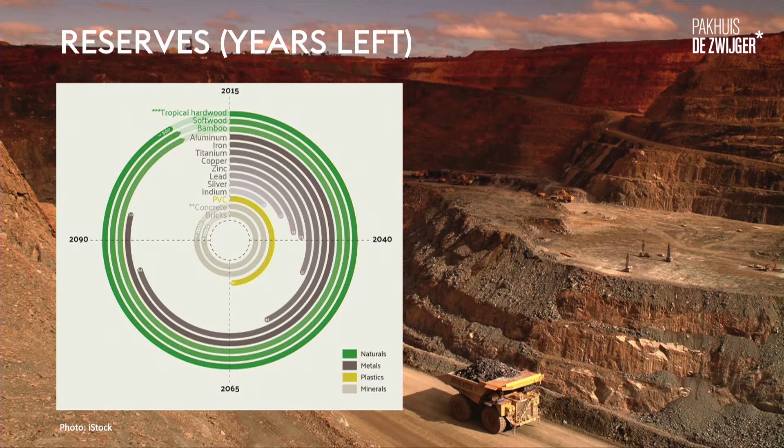In this graph, you see the reserves of the most important materials. And you also see that by the end of this century, metals used in the building industry will be depleted. And the same applies to plastics. And don't put all your money on the circular economy, because only 9% of all our materials worldwide are actually being recycled.

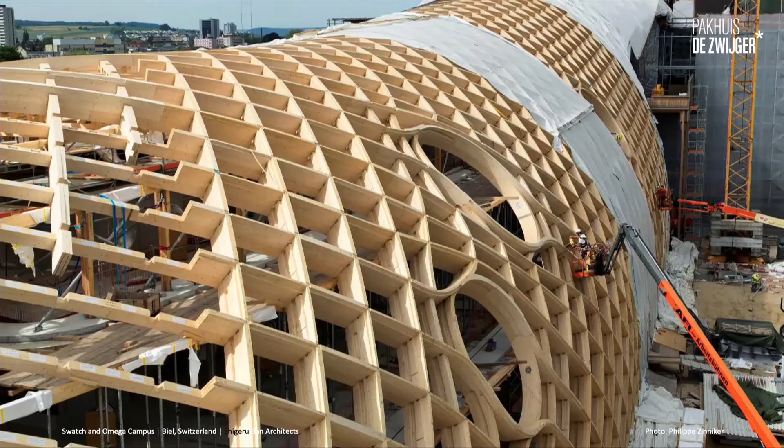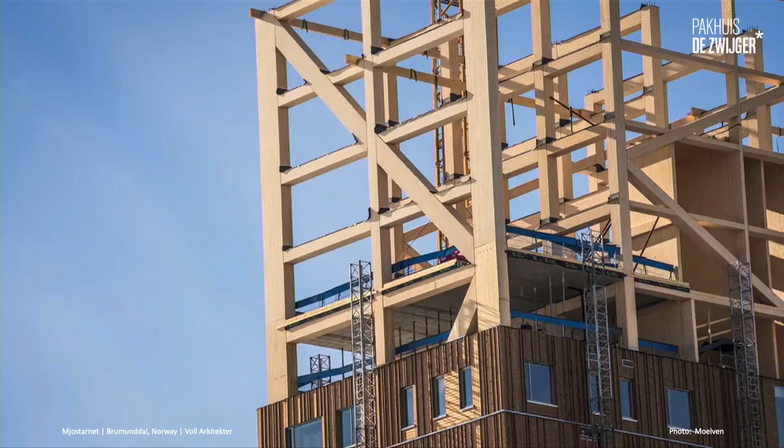I compare it like building with Kapla. Maybe you have done it in the past. Very rectangular, evenly strong wooden elements are used to create all kinds of buildings and fantasies. Well, this is not fantasy anymore, because this is Kapla for grown-ups. This is mass timber. So you can make enormous structures out of uniform elements with mass timber. And we can also build skyscrapers this way. This building is 85.4 meters tall. It's in Norway, built with glulam beams and cross-laminated timber.

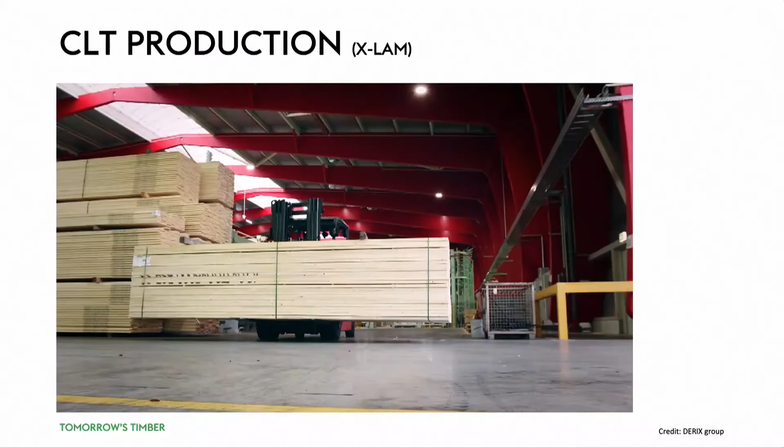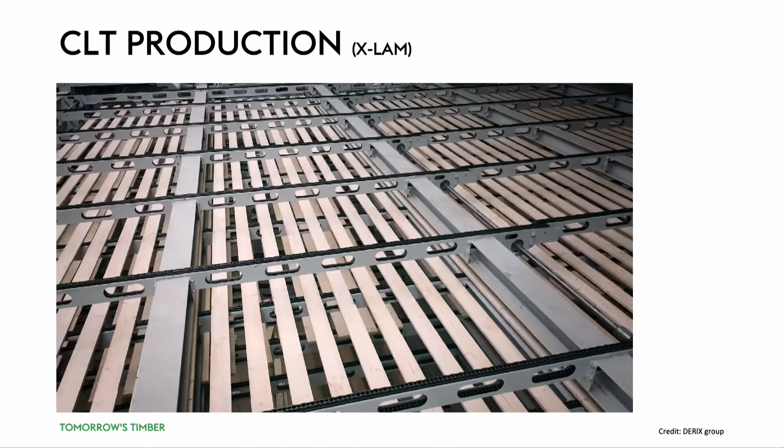I'll show you how this is produced. From sustainably managed forest, you take boards from softwoods, abundantly available. Then these boards are connected to each other in a longitudinal way with a finger joint. So you have very long boards where all the defects are taken out. So uniform strength. Then you locate them on top of each other, and then you cross-laminate them. And then again, up to 3, 9, maybe even 11 layers thick.

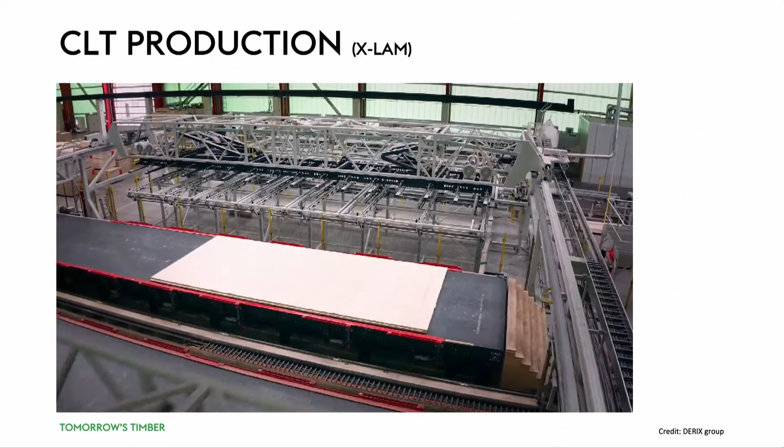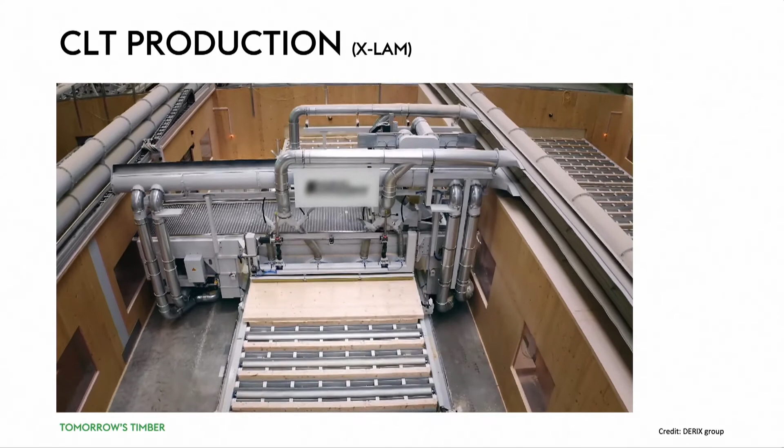The glue that's used, it's only 1%, and that binds the walls and slabs together to get a very strong wall or flooring element. The good part is, in the factory, as you see here, you can add all the fittings, all the sleeves for the electricity, for the installations. And then your building site becomes like an assembly site. It's almost like a huge IKEA cupboard. Everything comes pre-packed, you take it out of the package and install the building in a very quick manner.

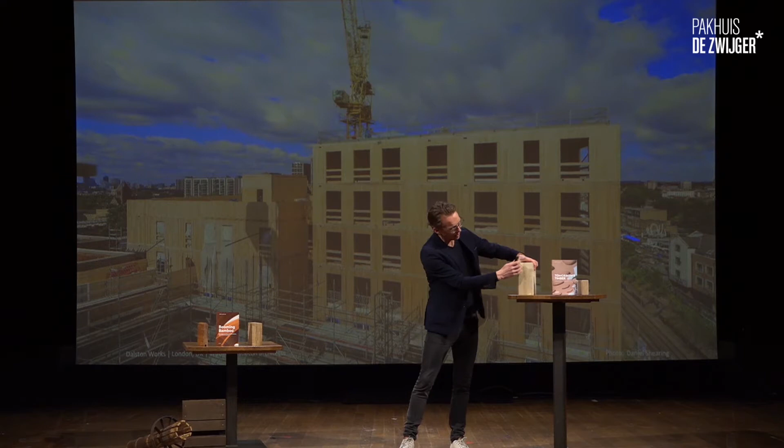So this is an example of cross-laminated timber. So you see here the various layers that are being used. The top layer can have, for example, an oak finish or another more luxurious wood type. So this way we can build very high buildings in a very quick way. The tallest building so far, the Mjøstårnet building in Norway, I told you, almost 86 meters high. And it was built also with all these prefabricated elements. And the construction time was 1 year quicker than it would have been built in situ concrete.

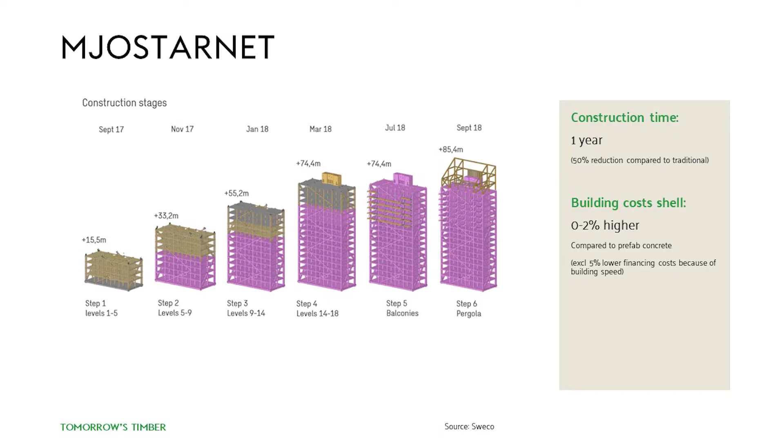Altogether, the building costs are more or less as high as building in prefab concrete. Then if we look at the biggest myths, because I hear your brains already thinking, okay, very interesting, but what about fire safety? Is this durable?

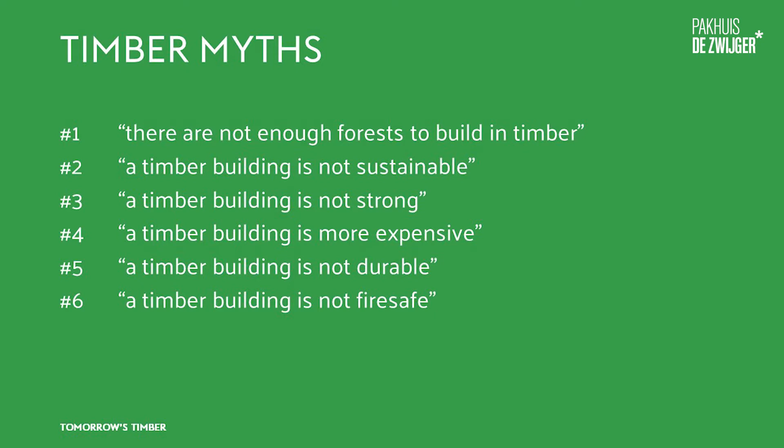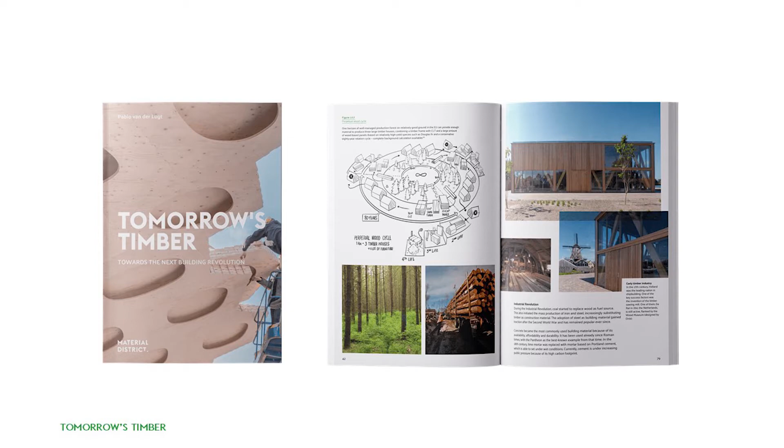So there are many myths about mass timber building. And actually, I also had these questions about 5 years ago. And I did a lot of research about it, and I published it in this book, Tomorrow's Timber. And I can tell you most of these fables can be dispelled. And I'll tackle a couple of them in this presentation.

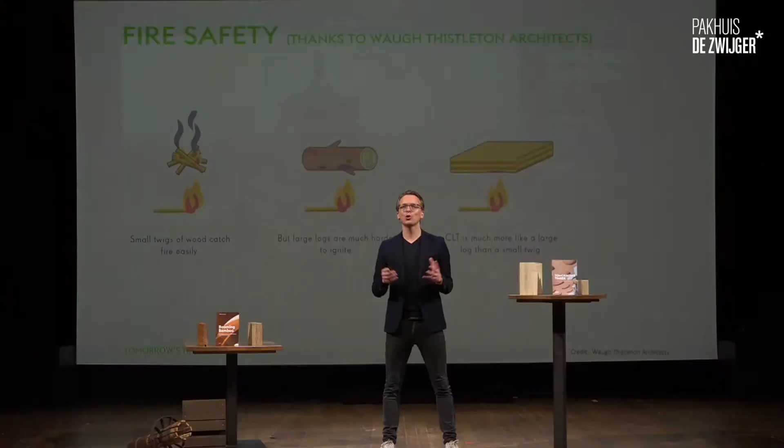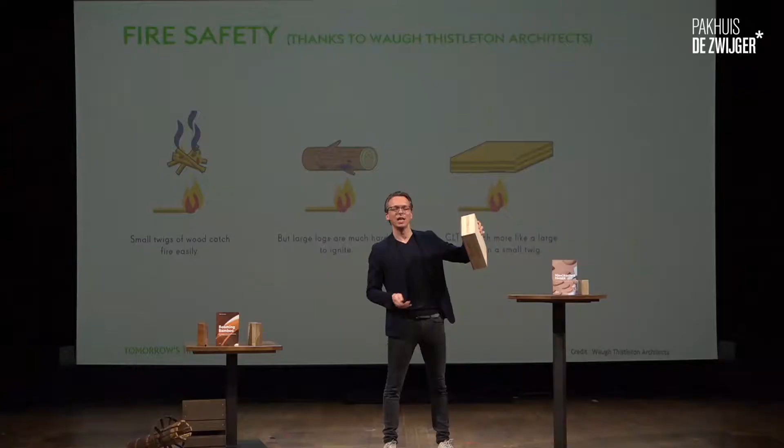Fire safety. Well, if you try to put this block in your fireplace, you can imagine what happens. It will extinguish, it won't burn. You maybe have a little bit of charring. And that's also how we tackle fire safety in mass timber building.

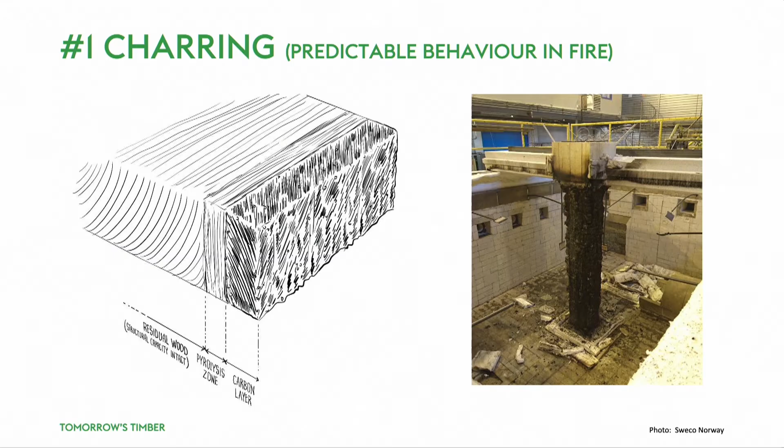The example on the right is a one-on-one fire safety test on the Mjøstårnet building in Norway to reach the 120-minute fire safety class. And they just do it by over-dimensioning slightly and knowing that at the outer layer of the wood, there will be a charring layer. And behind this charring layer, the wood will keep its structural quality. So you can exactly do the calculations.

Usually it is combined with encapsulation, so part of the timber will be finished, for example, with gypsum board, and combined you easily reach all the fire safety classes. So usually it's done this way. One of the surfaces is kept intact, and further a little bit of over-dimensioning, taking into account the charring. So these are fables that can quickly be dispelled. Fire safety is not an issue, durability is not an issue.

But let's look at the more positive things about building with wood, because building with wood gives a lot of fun and energy. It's good for the planet, it's good for people. So let me quickly take you through some evidence based on these aspects. Well, first of all, when trees grow, they absorb CO2 from the atmosphere. This is the magical formula, photosynthesis. Storing CO2 in the wood, oxygen as a bonus in return.

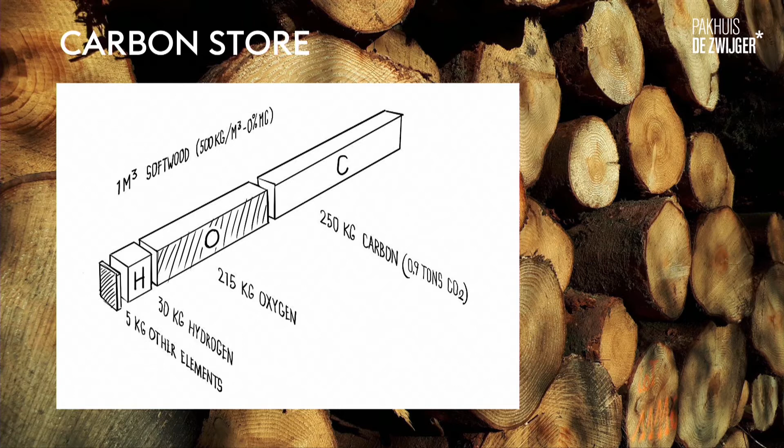And through the lifetime of the wood, the carbon will be locked in the material. Half of the wood's weight is carbon coming out of the atmosphere. In general, you can say that 1 cubic meter of wood captures almost 1 ton of CO2 for the lifetime. So it's a kind of carbon store.

And then if you look at the CO2 emissions during production of CLT, I just showed you this factory, you can see here that CLT uses a little bit lighter wood species, so it captures a little bit less CO2, almost 3/4 of a ton. And then you see during production, in total, glue and energy for pressing, sawing, transport, it is only 20% of the CO2 emissions compared to the CO2 locked during the lifetime of the material.

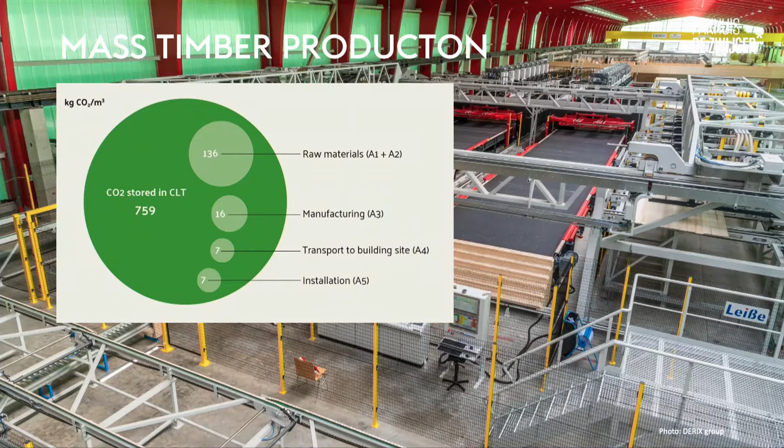And then if you take into account that all this wood comes from sustainably managed forests, so a tree is harvested and a new tree is planted back, then you can understand that the forest becomes a carbon pool, and the carbon will grow, and then it will be harvested. And then the wood, you shouldn't burn it for energy, but you're going to put it in the built environment, and then you do it again. And the carbon will be locked for even longer in the built environment.

So if you start building with wood instead of concrete and steel, per ton of wood applied, you save around 1.5 tons of CO2. So that's the third benefit of mass timber building. And then these kind of buildings actually are a carbon store, a huge carbon bank.

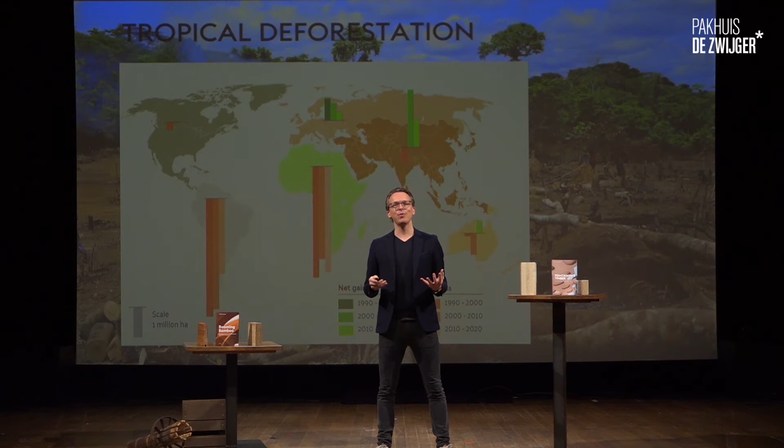So, carbon negativity. Second point has to do with the renewability of timber. And what always fascinates me, I always get this question: but if we build in wood, then we have to cut the tree, and we will lose all our forests. But people don't think where the metals and the mineral materials come from. They don't grow back. But I understand where it comes from. It has to do with all our memories related to tropical deforestation.

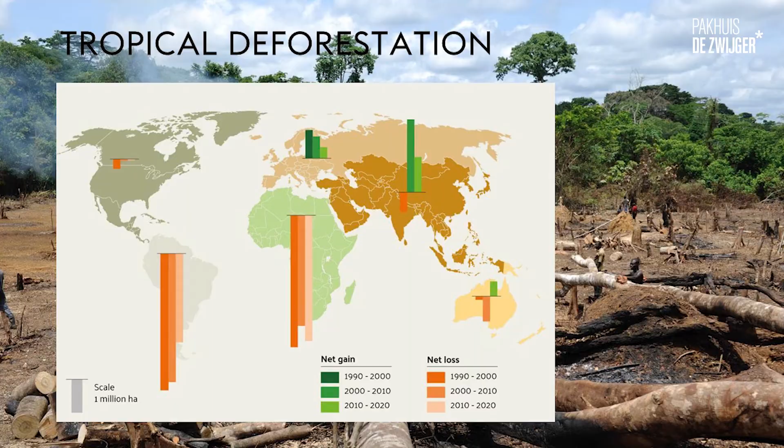And yes, tropical deforestation is an issue, but the driver for tropical deforestation is not the demand for wood. It is conversion of land for large-scale agriculture, for palm oil, for soybean production, and especially for the meat industry, conversion to cattle land, and infrastructure. These are the drivers for tropical deforestation. And if you look worldwide at the forestry trends, yes, this tropical deforestation continues. But in the northern hemisphere, you see that the area of forest is actually increasing, already the last 30 years in a row.

And if we then zoom in to the European forest, there's an area of about 180 million hectares in forest. That's about 40% of the European land cover. It grows by 0.3 million hectares a year. Almost all these forests are sustainably managed. And more than half of them are actually sustainably certified following very stringent chain of custody guidelines by FSC and PEFC, safeguarding social, environmental and biodiversity issues.

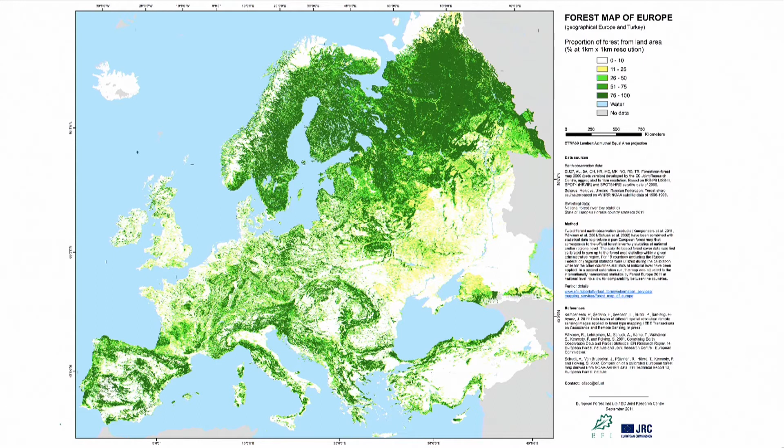So this is what that looks like in numbers. Every year there are 800 million cubic meters of wood that grow. Of this, 500 million cubic meters is harvested. And about 50 to 100 million cubic meters of that is available in quite accessible places. So we could ramp up by 50 to 100 million cubic meters right away if we build more factories.

And if we look at the building deficit and home deficit in the European Union, but also in the Netherlands, and then look at this additional potential capacity of 70 million cubic meters, and take into account converting that to mass timber products, you will have about 30 million cubic meters. A house like this, a private home, a big one, uses about 60 cubic meters. An apartment would be 30 cubic meters.

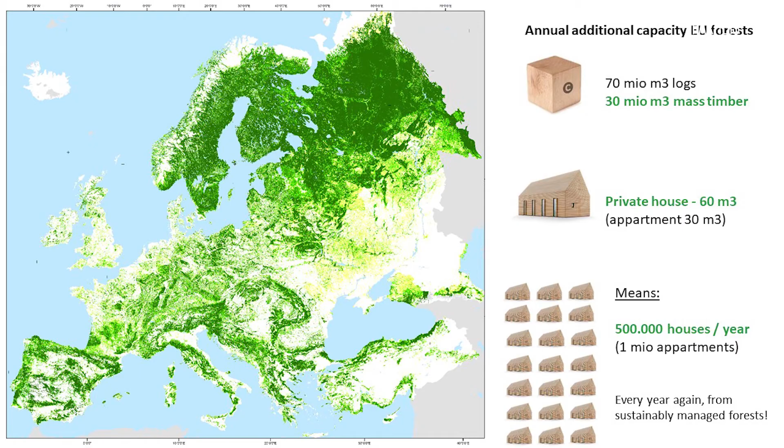That means that just based on the annual available capacity, we can produce in a sustainable way 500,000 houses each year, just from the available additional stock that we have in our European forests. So don't worry about the availability of wood. And I don't talk about cutting trees, it's harvesting trees, because they are sustainably managed in our forests in Europe.

Then the third point is circularity. Everyone is talking about circular building. But the good part about bio-based materials and timber is that they are workable. So you can work them again. You can cut a piece off, you can shave it at the end of life. You just have to think about demounting them and making connections that are demountable at the end of life. This is a terrific example right from the central business district in Amsterdam, CIRCL Pavilion.

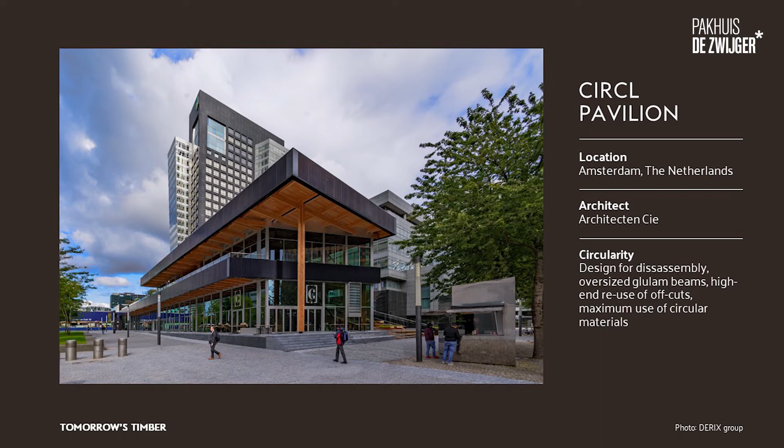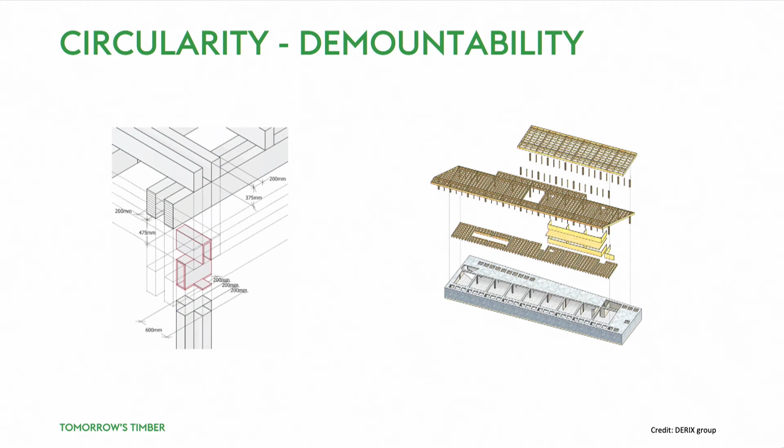And when bankers start building in wood, then it becomes interesting, because then you know the business case works out well. Here you see how these demountable connections are made in this building. And the members, the glulam members, are slightly overdimensioned to make sure that in the end of life it can be taken back and it has multiple uses in new applications. The producer and the contractor have already said, I will take the timber back because it just holds so much value. Never are you going to burn this because it just retains too much value.

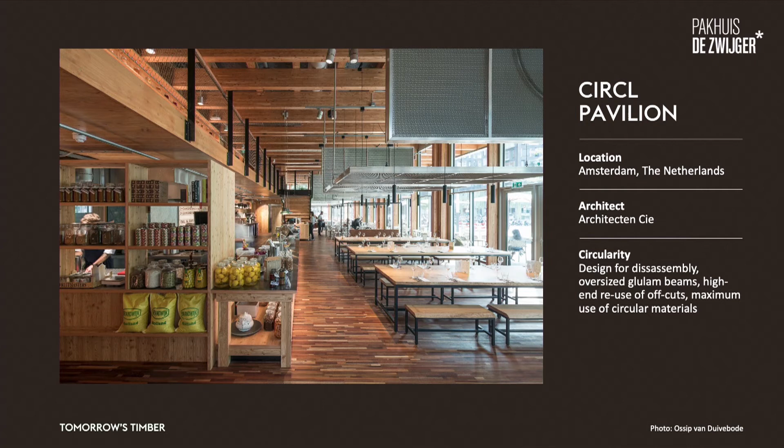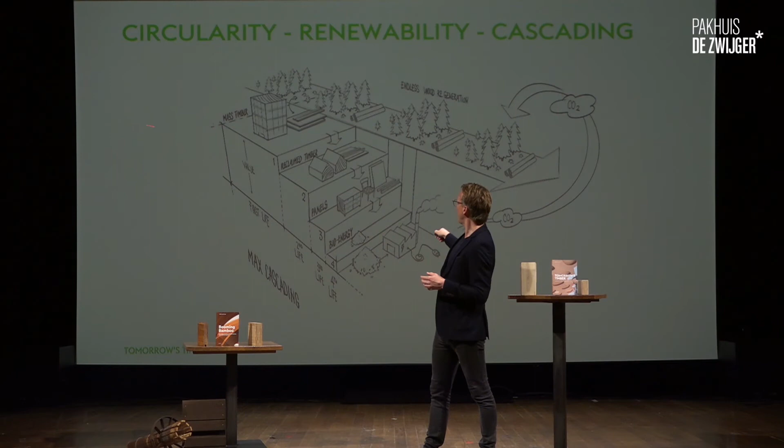This is what the CIRCL Pavilion looks like from the inside. Also the interior is fully circular. And then when you start to think of circularity, and you look at the renewability also, and take that into account, then if you have a mass timber building, the first life will easily be 50 years or longer. Then if you build it in a circular way, the second life will be maybe as long. So you easily reach the 100 years.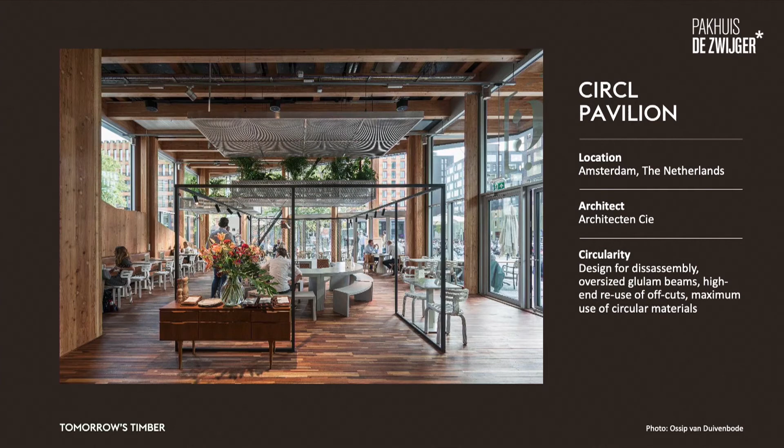Only then you start chipping it for panel production. And only in the fourth life are you going to use it for bioenergy. That makes sense. And in the meantime, you see that the trees have grown back 2 or 3 times in sustainably managed forest. To me, this is what circularity is about. And if you look at the CIRCL Pavilion, actually the flooring is a second life use of timber from other buildings. And you can also do constructions this way.

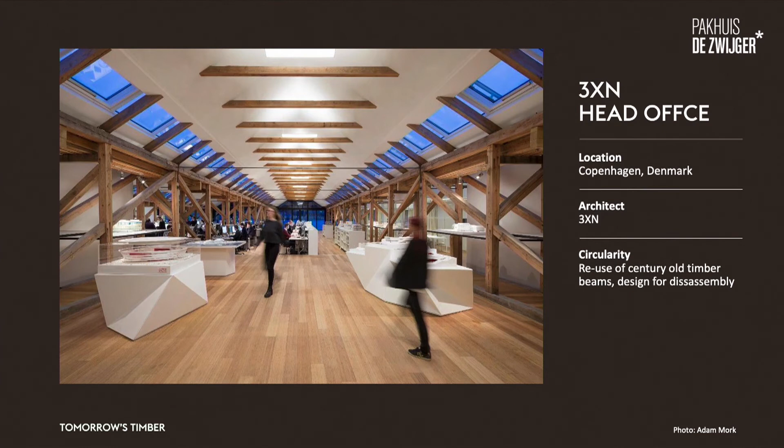This is an architectural office, 3XN, in Copenhagen. And they make a one-on-one reuse of these beams that are recollected from a nearby naval warehouse and reused in the bearing structure. So this is very beautiful, locking carbon, but also circular building.

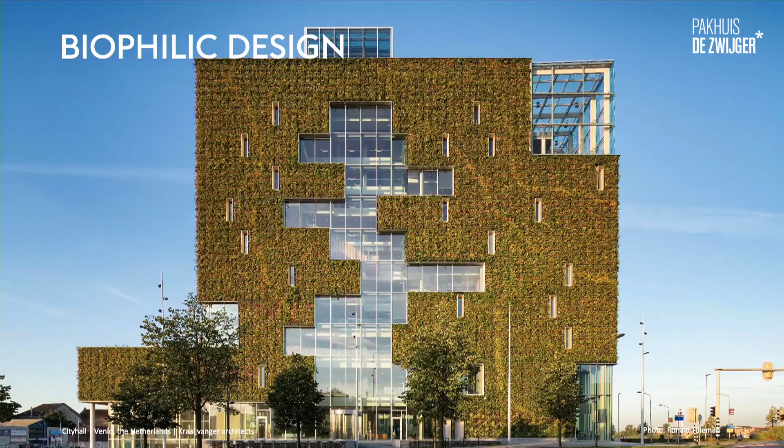Then the fourth aspect, that has to do with us as people. We are basically creatures from nature. That's why we like to be in nature. That's also why we connect so much to natural materials, also in the inside. This is called biophilic design. And there are more and more studies that show that people love to be within a natural environment. This building is a beautiful example of a work environment where biophilic design is taken into account. The facades are totally green.

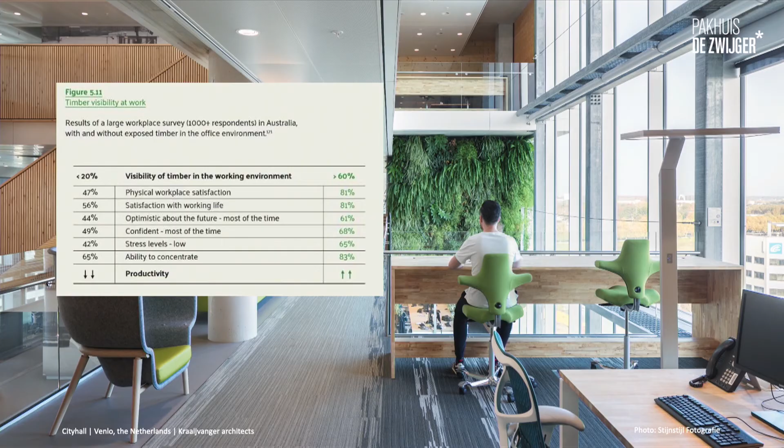This is City Hall Venlo, by the way, in the Netherlands, built following the cradle-to-cradle principles. And in the interior, you see a lot of natural materials that are being used, and a lot of plants. And we see more and more research that shows that people living in an environment where biophilic design is taken into account, and natural materials in the surfaces are a very important aspect of that, have better productivity, higher concentration levels, lower stress levels, and this is also directly related to the visible use of timber.

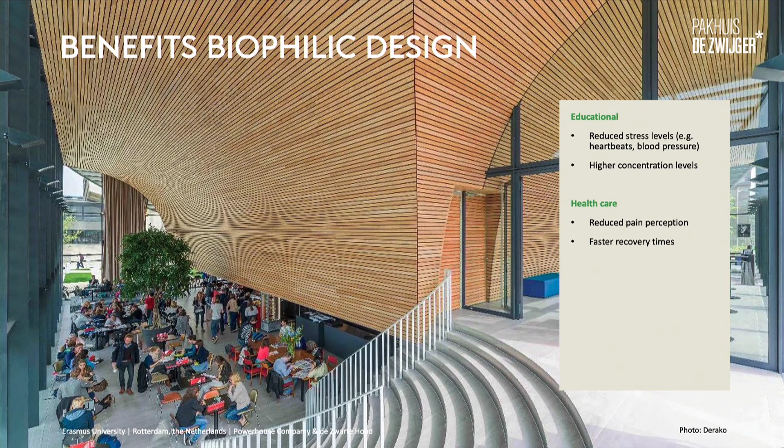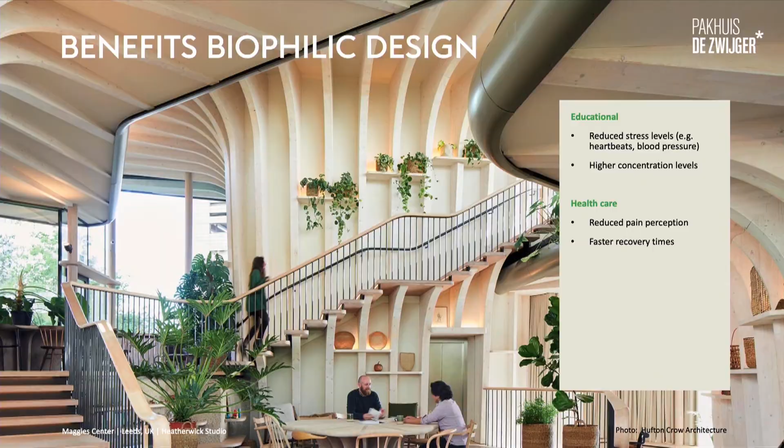This also applies to our schools and educational institutes like universities. There are various studies that show that people love to work in a neighborhood where wood is in the surroundings and have higher concentration levels. Hospitals, cancer centers, the Maggie's centers in the UK, they all apply a lot of wood in a visible way in the interior, showing even quicker recovery rates and at least lower stress levels. This is another example of a Maggie's center in the UK.

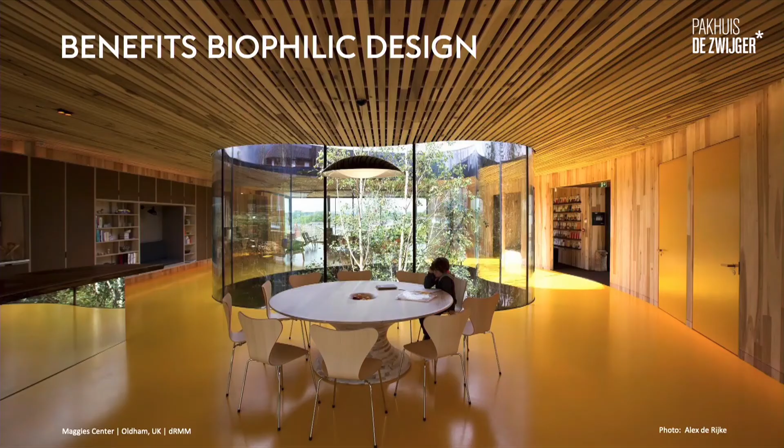Look at the tree that's located right in the middle of this building. So you see the source where the wood comes from and how it is applied. Very interesting aspect as well. So these are a little bit more, let's say, environmental and people aspects why people should build in wood. But there's a very practical aspect to it as well. Mass timber has major advantages during the building process, and that pays itself out.

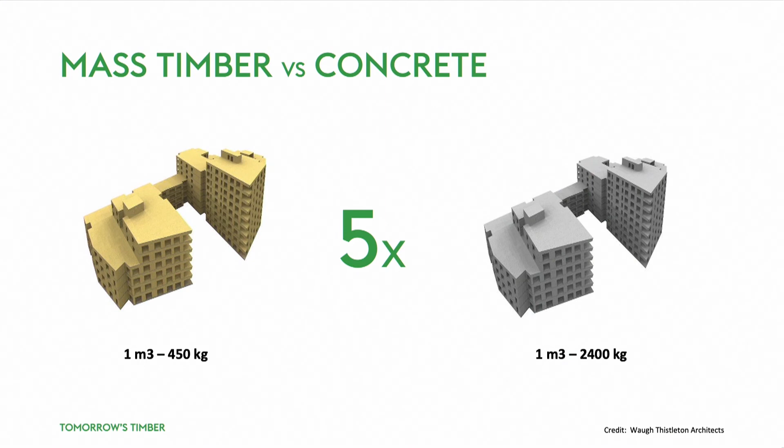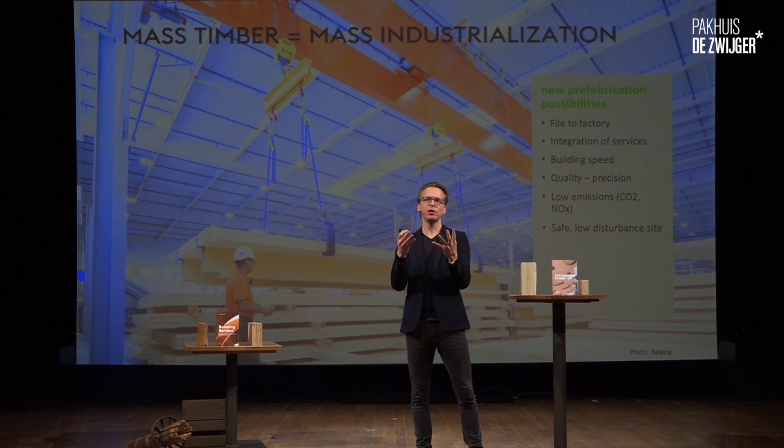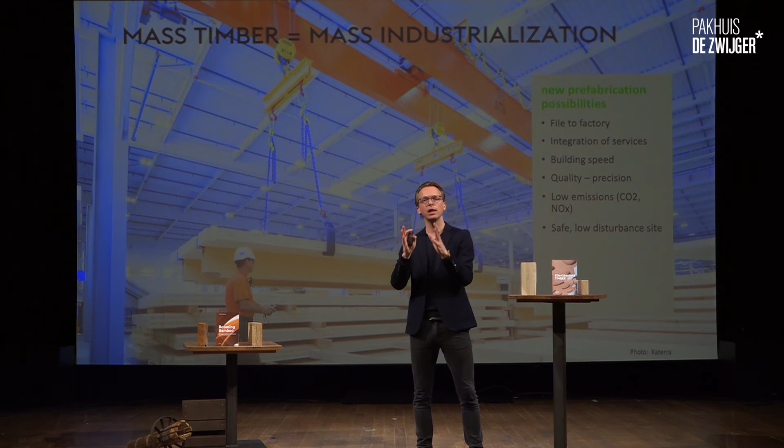If you look at mass timber compared to concrete, it is 5 times lighter. That means you have to build in a different way. And the prefabrication possibilities of building in mass timber are huge. Using a BIM system, a building information modeling system, you can send your design to the factory, which can directly prefabricate those big wall, ceiling and flooring elements, including all the installations. This way, the building site will become, as I mentioned in the beginning, an assembly site.

And you might see this building. I want to show this as a case. Dalston Works in London by Waugh Thistleton Architects. You might think, well, this is not wood.

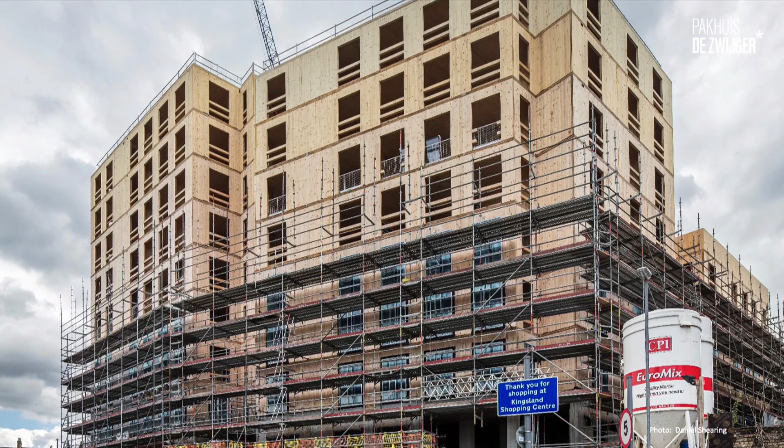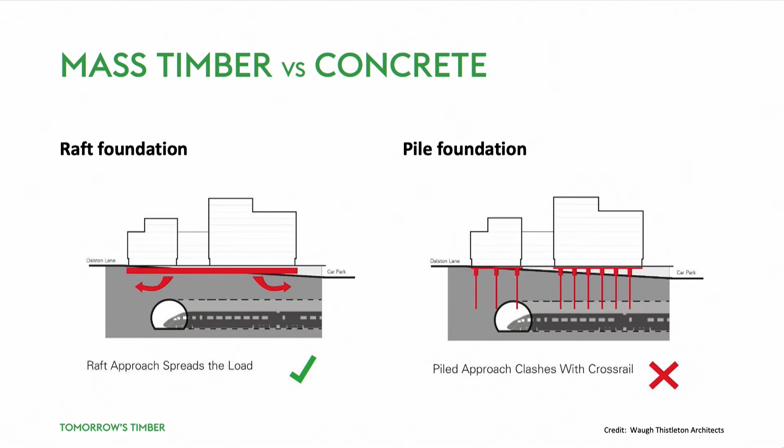If you look at the inside, you don't see any wood, but it's fully made out of mass timber. They used mass timber here for practical reasons. Why? Because this one is in the middle of London, and there was a tube going below. So they needed a light structure. They needed a raft foundation. That's why they started looking for a lighter building construction method, therefore mass timber.

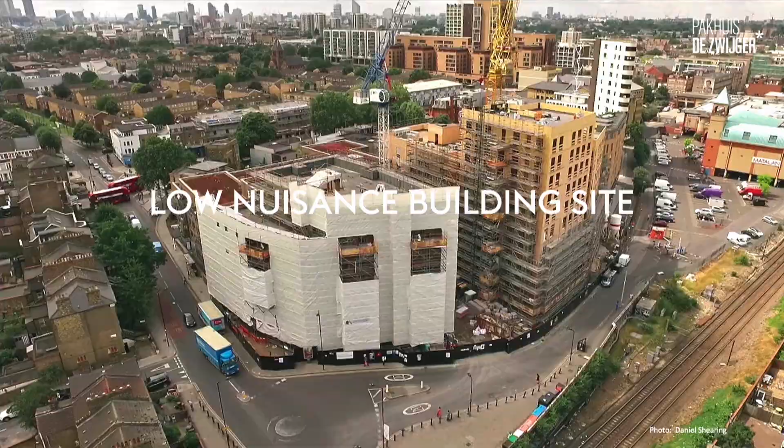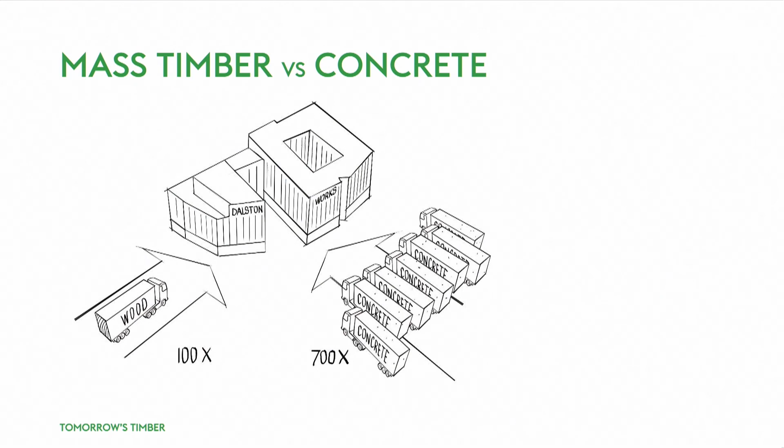Also, look at the building site, right in the middle of London. Very little space. People don't want noise here. So they wanted to make the building process as short as possible, with as little nuisance and noise from heavy trucks that supply the building materials as possible. Using mass timber only meant 100 heavy truckloads instead of 700 if this building would have been made in concrete. The building time was 9 months quicker because of this IKEA-type building system, just an assembly site.

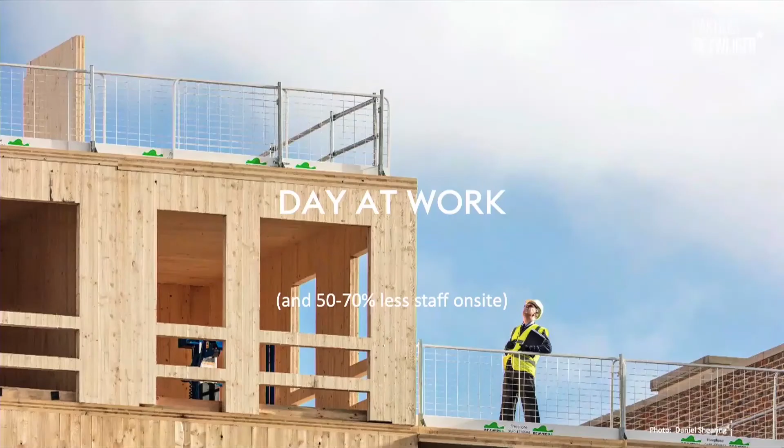The cranes are smaller. You need less people on site. You can sometimes even use electrical cranes, so also the nitrogen emissions are very low. In general, the building site becomes a fun site to be at. You have less people, and the people enjoy it more to work on such a building site. You can imagine this.

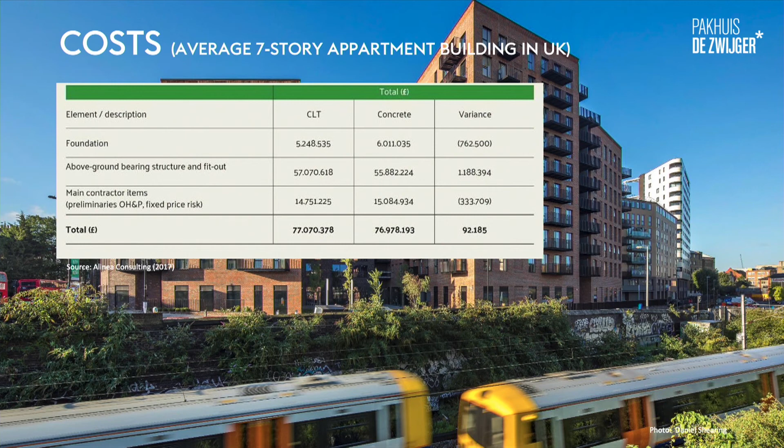And if you then break down the costs together, and this is from a UK typical case study for a 7-story apartment building, and you compare, in this case, CLT with concrete, then you see that for the foundation, CLT will be less expensive because it's lighter. But above ground structure, you see the costs are still higher. The material costs are still slightly higher. Then, if you look at the processing cost, the costs are lower. And if you add all of this together, then the cost difference is really marginal, slightly higher.

But in the future, there must be a carbon tax. Climate change is coming. We have to act, including a carbon tax. The difference will go in the favor of mass timber building. And then, to finalize my presentation, I want to give you a future outlook. What will this mass timber revolution look like? What can we expect the coming years?

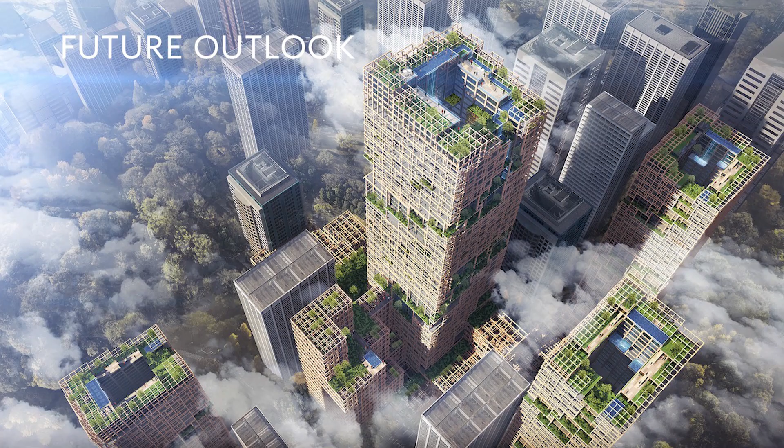If you look at the legislative part, then you see that also the governments are taking their responsibility. In France, 50% of the new buildings by the government have to be made in mass timber. If you look at the European Green Deal proposed by Frans Timmermans, then you see there will be, not reforestation, afforestation, so additional forest. 2 or 3 billion trees will be planted until 2030. So this will really beef up the building industry related to mass timber.

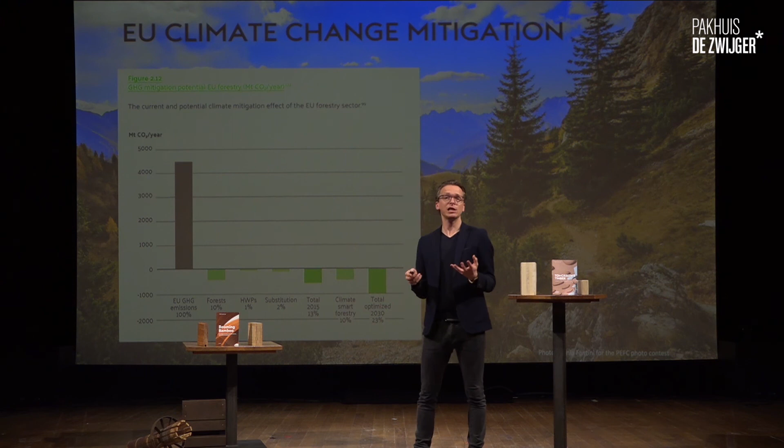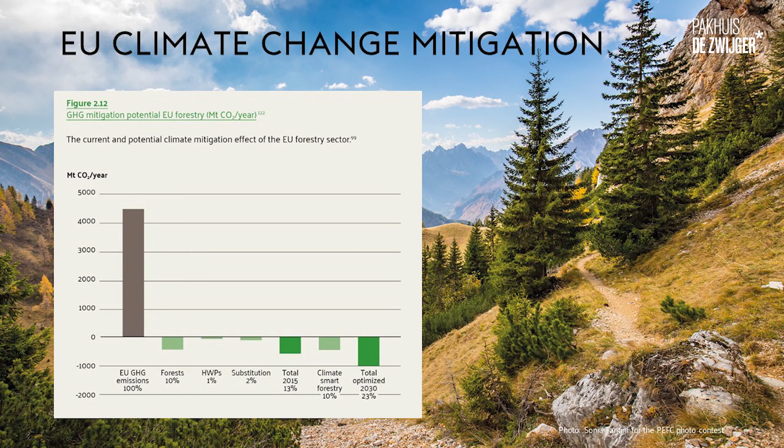And this is important because if you look right now at European CO2 emissions and how much is compensated by the European forestry industry, it's 13%. If we do climate-smart forestry and do indeed this reforestation and afforestation in a sustainable way, it can be 23% in 2030. So 1/4 of all our CO2 emissions will be solved by forests as forest products. So it's not a surprise that this is a very potential route.

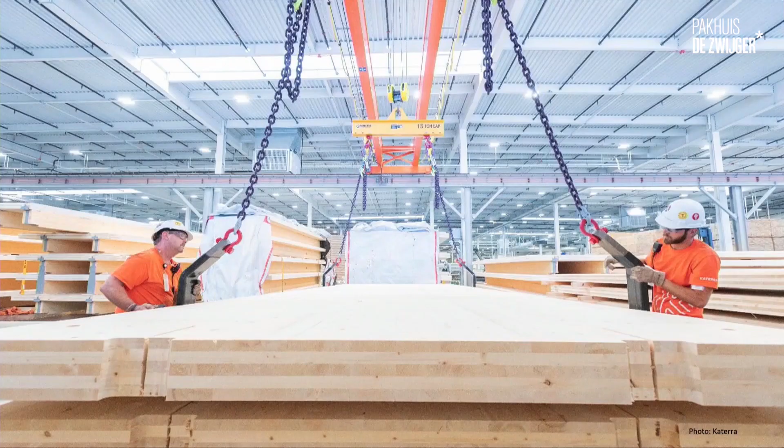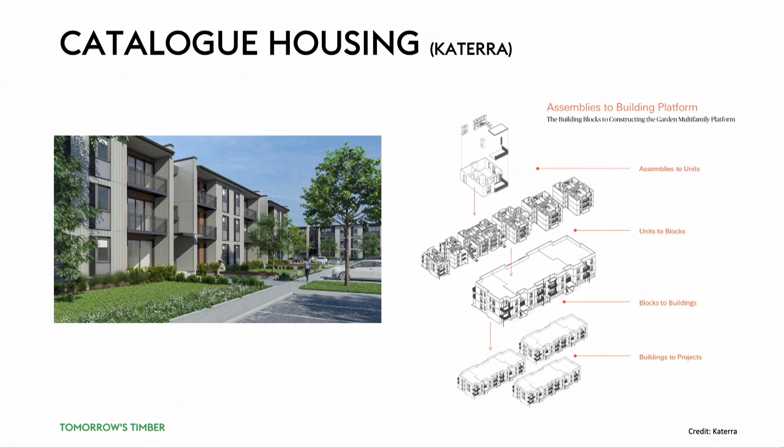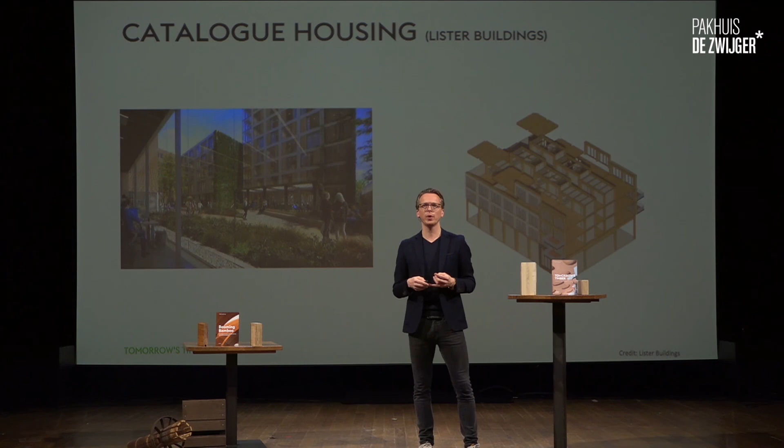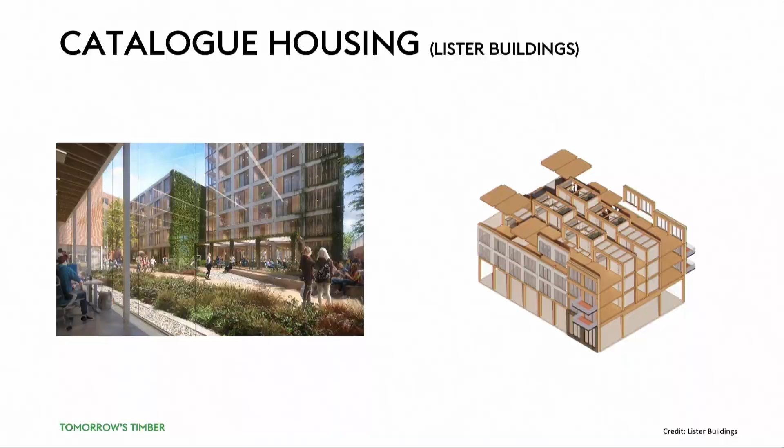But if you look at the larger scale, then we'll move into those big factories where we have catalog house building. This is Katerra in North America, making all this catalog housing from mass timber products produced in the factory, installed on site with a lot of customization possible. In the Netherlands, there are similar developments. This one is from Lister Buildings. They make a circular system made out of glulam elements and modules, which can easily and quickly produce multi-story apartment buildings.

And this way, the cities of the future will look a lot different. They will look a lot more humane. They will store carbon. They will attract nature. It's up to us as architects, as developers, to make this happen. Because I believe that tomorrow's timber starts today.